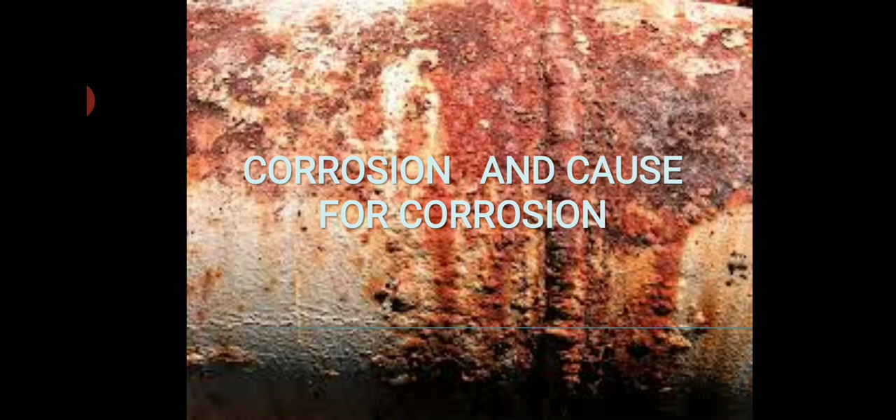Hello students, today in this video I am beginning with module 2, which is corrosion and metal finishing, and the topic which I have chosen to understand in this video is corrosion and cause for corrosion. This corrosion word is often heard, or commonly it is known as rusting. Now what exactly this corrosion is, definition we'll understand in this video, as well as reason for corrosion, why this corrosion takes place, whether it is natural one or not. The reaction that takes place during corrosion we'll understand in the next video, under electrochemical theory of corrosion. But here, reason why corrosion takes place, that cause we'll understand in this video.

So let us begin with some introduction, students. This corrosion word is not a new word. From centuries we are hearing this word, and so many philosophers back then wrote on corrosion. Then scientists started thinking about corrosion, and there was discovery of how exactly and why exactly this corrosion does take place.

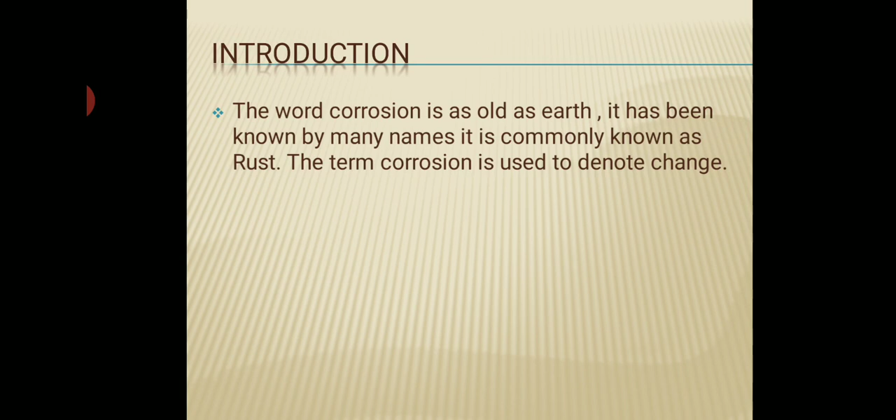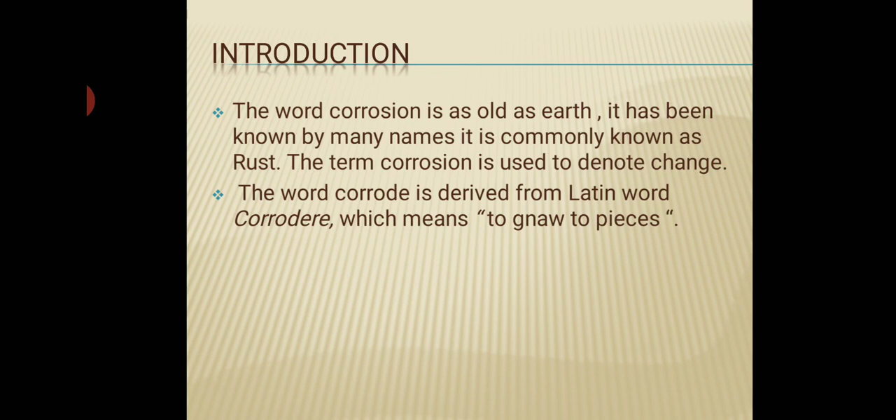Now the word corrosion is as old as earth, and it has been known by many names. Commonly it is known by the name rusting or rust. The term corrosion is used to denote change. What exactly happens during corrosion is that metal changes its property. This word corrosion is derived from the Latin word corrodere, which means to gnaw to pieces. This gnaw to pieces meaning is nothing but ultimately anything which converts into pieces, which destroys into pieces. This is the meaning of this word corrosion or corrode.

So now, a very important thing: corrosion plays a major role in world economy. India itself loses around 4 to 5% of its GDP annually on account of corrosion. Here, the effect of corrosion on economy could be direct or indirect. I'll give you one example to understand it more easily.

For example, in industries there will be boilers, big boilers made up of metal, and in those boilers water will be taken and converted into steam or superheated steam. That steam is utilized to run machinery, or has its own uses in industry. During this boiling process, the inner surface of the boiler gets corroded, and this specific type of corrosion is known as stress corrosion. This phenomenon we are observing is called caustic embrittlement. In detail about it we'll understand in the coming videos on types of corrosion. If there is caustic embrittlement, the inner wall of the boiler loses its efficiency, and there will be effect on steam production.

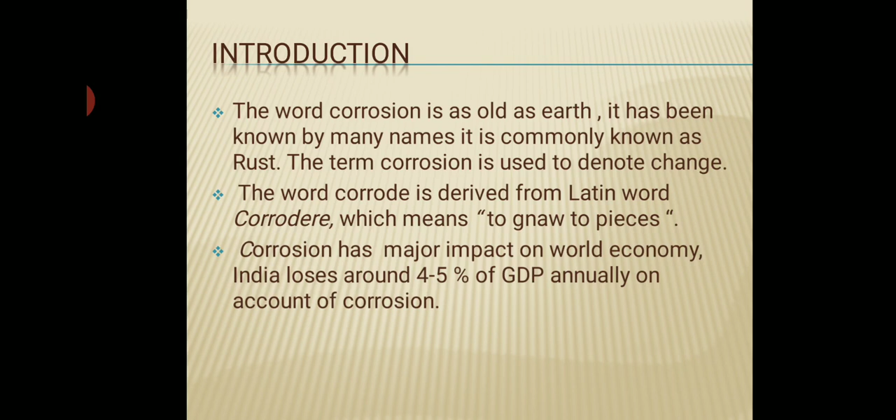So now we'll understand the definition for corrosion. Corrosion can be defined as spontaneous destruction or deterioration of metal by chemical, electrochemical or biochemical reaction with the surrounding environment. So what is corrosion? It is nothing but a spontaneous destruction reaction, where the metal loses its property by chemical, electrochemical or biochemical reaction with the surrounding environment. Simple definition of corrosion.

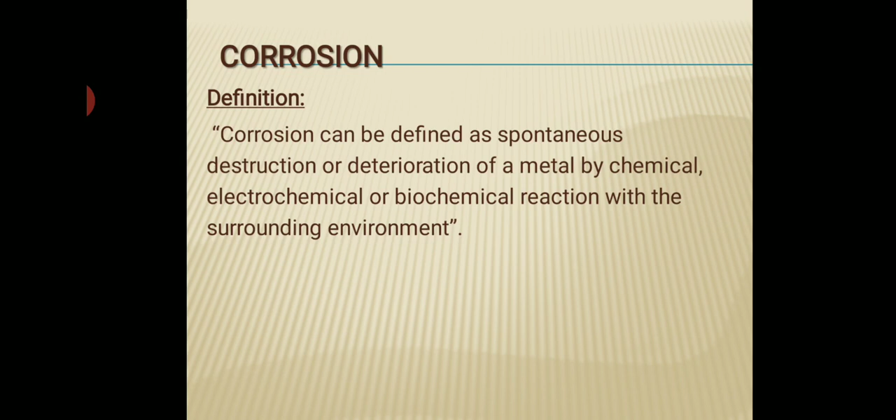Now we'll understand some example for corrosion before knowing the cause for corrosion. Very obvious, and we often see this in our day-to-day life: rusting of iron. So what is this?

First example: formation of a layer of reddish scale of hydrated ferric oxide on the surface of iron is called rusting of iron, when iron (Fe) is exposed to moist air.

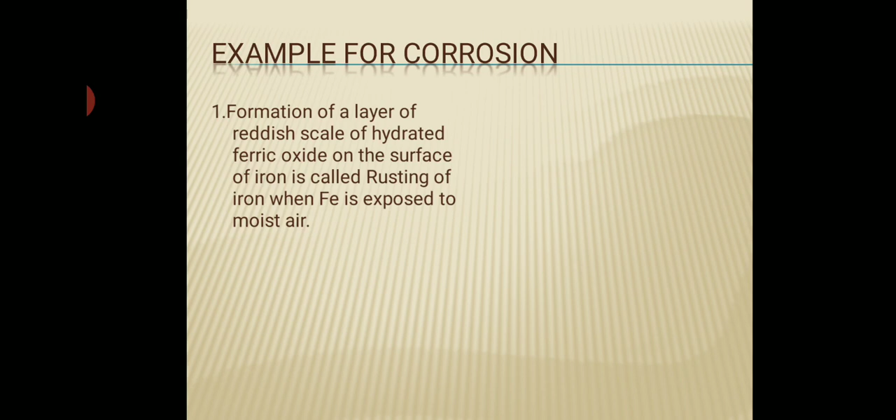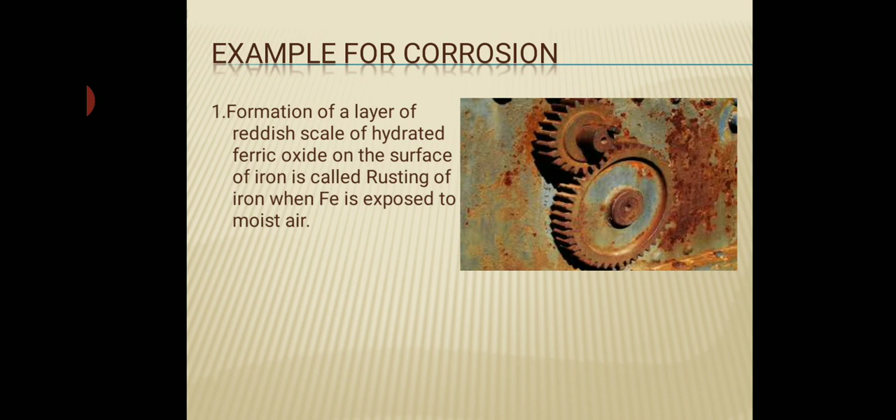Here is a picture showing some machinery. This reddish part is nothing but the rusted part. Rusting, that reddish scale, is nothing but hydrated ferric oxide. Initially there was bluish paint on the machinery, but it failed to withstand corrosion, and corrosion took place.

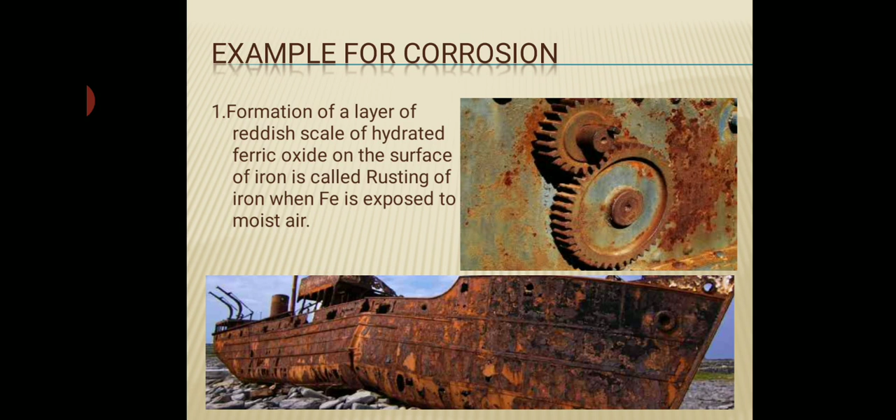So these two examples are for rusting of iron. Next, I have chosen examples of metals which we use in our day-to-day life.

Second example: formation of a green film of basic carbonate (CuCO3 plus Cu(OH)2), copper carbonate plus copper hydroxide mixture, on the surface of copper when exposed to moist air containing carbon dioxide. When copper experiences this condition, it undergoes corrosion and forms a greenish film. In the case of rusting it was a reddish film, here it's a greenish film.

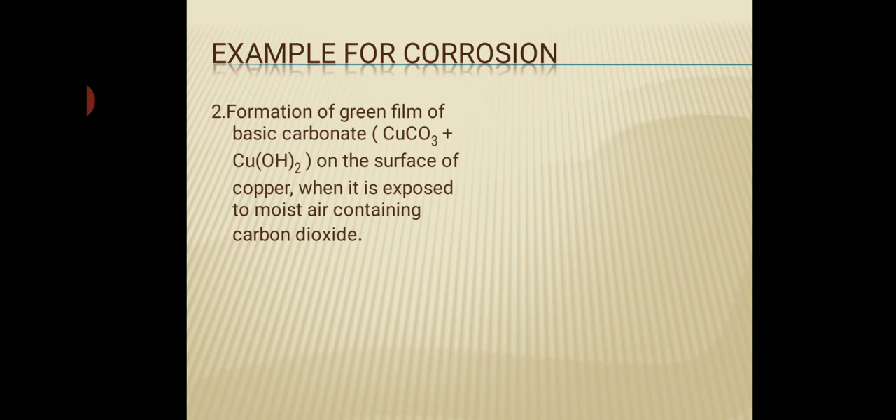Here is a copper article, a copper vase. This greenish part coated on the surface of the copper is nothing but the rust of copper. One more example: copper pipes once again developed a greenish film on their surface because of corrosion of copper.

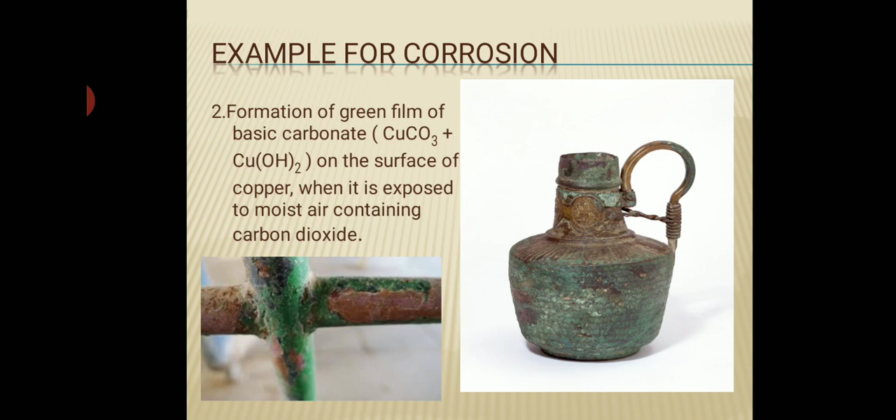Next example is formation of a thin oxide layer, Al2O3, aluminum oxide layer, on the surface of aluminum metal when it reacts with oxygen or moisture.

This ferrous hydroxide formed initially will be protective in nature. What do we mean by protective in nature? If the surface of the metal is converted into its compound form, it resists corrosion. This technique comes under the concept of prevention of corrosion, which we'll understand in the next coming videos.

During the initial state of corrosion, whatever corrosion product is formed acts as a protective barrier against further corrosion. But if the moisture is too much, if the heat is too much, and that layer ruptures, there will be a severe case of corrosion.

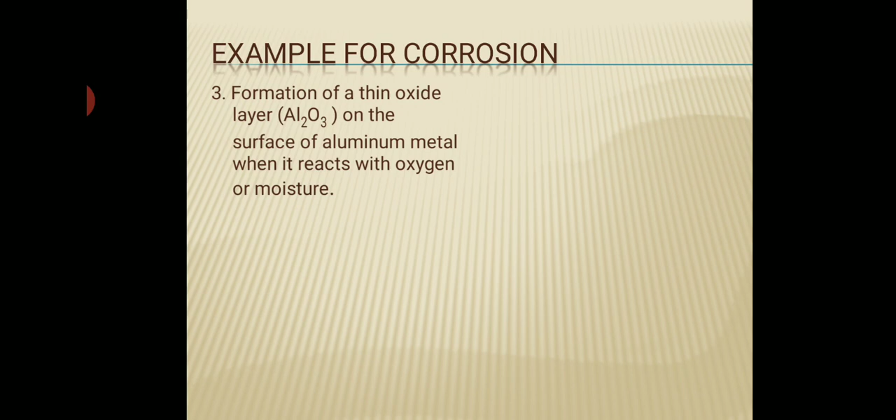Here is a picture of an aluminum frame. We all know that window panels are made up of aluminum. As you can see, this white powder is nothing but aluminum oxide.

One more example: this is an aluminum utensil, an aluminum basin. As you can see, there are holes formed. These holes are nothing but corrosion, particularly pitting corrosion.

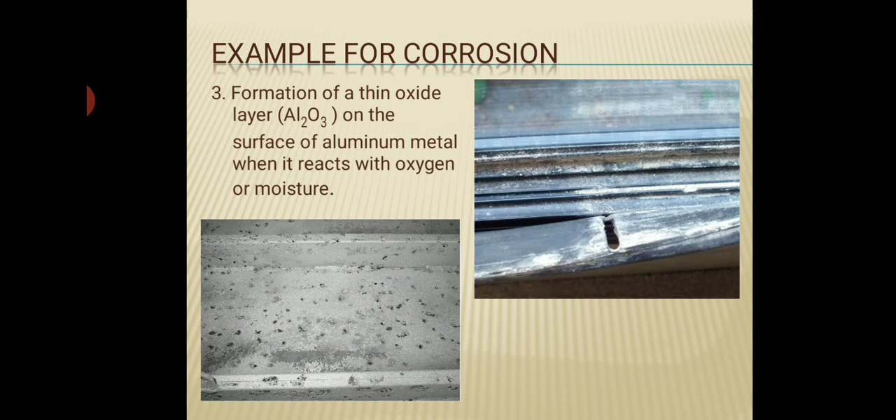So these were some examples of corrosion. Next we'll understand the cause for corrosion, point by point.

Very important: corrosion is a natural process. Why a natural process, we'll understand later. Just like water flow, from a higher level to a lower level, naturally water always flows from higher to lower level. Reverse, from lower to higher, is possible only when we apply pressure to it. Otherwise naturally water will flow from higher level to lower level. This is a natural phenomenon.

Similarly, in all natural processes, things tend towards a lower energy state. Suppose any element or matter possesses a higher energy state in nature; it will try to go back to its natural form, which will of course be at a lower energy state.

So here, okay, now how are metals naturally found in nature? They will be found in the form of ores and minerals, in which they will be in compound form or combined form. Metal will be combined with some other elements, forming a compound, and it will be in a stable form, a thermodynamically stable or lower energy form.

For example, iron, Fe. A very important ore of Fe is hematite. There are others, like magnetite, etc. But in hematite, iron will be in Fe2O3 form. So the iron element is combined with oxygen, forming an oxide, and that oxide will be stable. It will be there in the earth's crust as long as the earth is there.

But what we are doing is extracting metal out of the ore, Fe2O3. During extraction metallurgy, we are applying so many processes to that metallic ore. We are converting the compound form into metal form. Of course it has more usefulness as compared to ore.

Ore is just like a powder; hematite in particular, I'm talking here, is a brown color powder, or it looks like sand or mud. So we can't construct a chair from it. But imagine an iron chair: it is more durable. We can use it for so many years, and the only major problem with iron is corrosion. Otherwise it is very hard in nature.

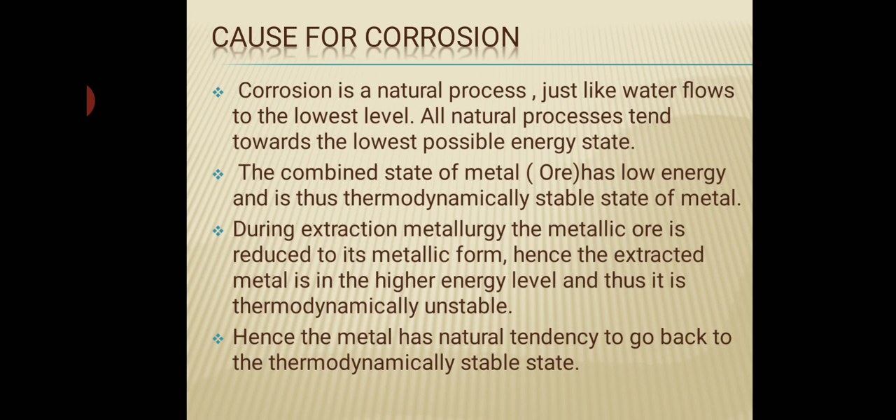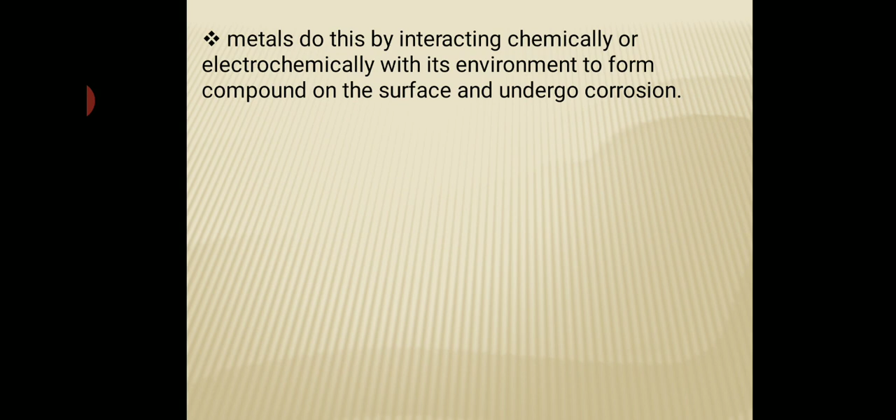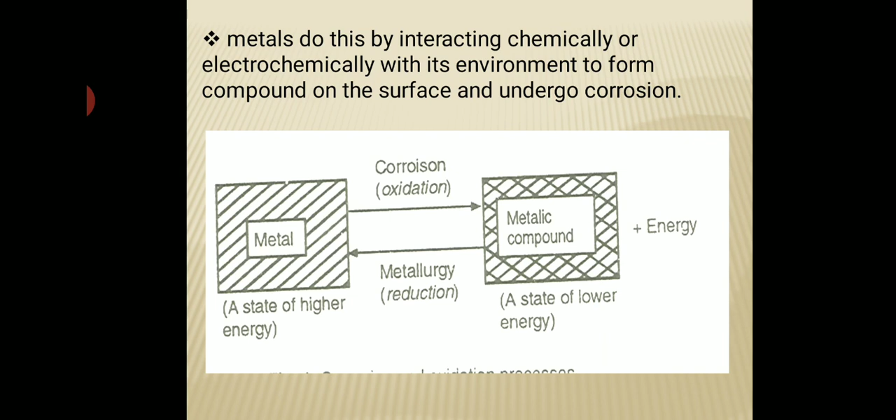Now during metallurgy, we give some energy to this metallic compound; we have to heat it to a really high temperature, and it is reduced to metal. So both are exactly opposite reactions to one another, which is why corrosion and metallurgy are interrelated. If we have applied metallurgy on a metallic compound and formed metal, that metal will try to go back to its original state. So it is a cyclic reaction, but because of external environmental entities, we do not end up with the same metallic compound we started with. I hope this gave a clear idea.

Why does corrosion take place, in reaction form? We'll understand. Naturally metals are found as their ore, which is a stable form. Then we convert it into metal, which is an unstable form. During extraction metallurgy, we convert metal oxide into metal by using a reducing agent, and the oxide of the reducing agent is formed. As you can see here, metal oxide is in stable form, and metal is in unstable form.

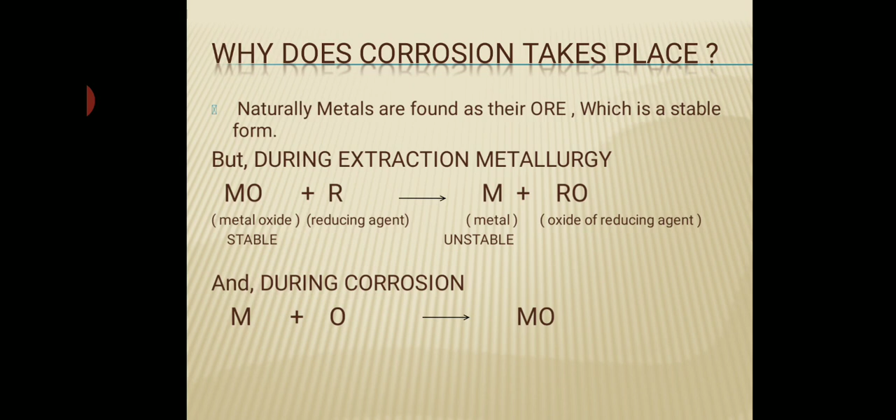Then during corrosion, what exactly happens? Metal, which is in unstable form, combines with an oxidizing agent and converts into its compound form, which is stable. Metal, which is unstable, is now converted into a metal oxide, which is more stable. But the metal oxide will not be the same as what we started with, which is where the problem arises. I hope this gave you a clear idea of why corrosion takes place: we convert the natural form of a metal into its unnatural form, and it tries to go back to its natural form.